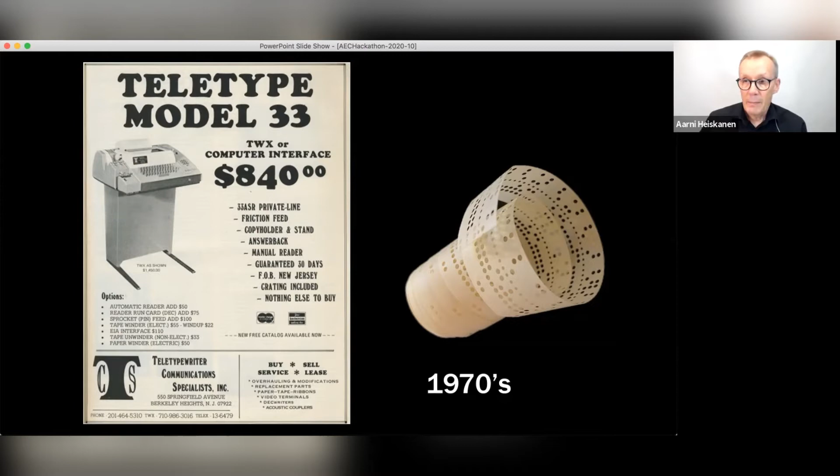Our industry is great, I must say. It can create awesome results, such as this library in Helsinki, but also it's full of surprises. In this case it was a pleasant surprise that it became so popular in a short time. But otherwise, construction is unfortunately full of risk, and it's a lot of manual work. It's not systematized, and so on. So it's full of surprises, and I'm not sure if everybody would like to work in a company that's full of surprises all the time.

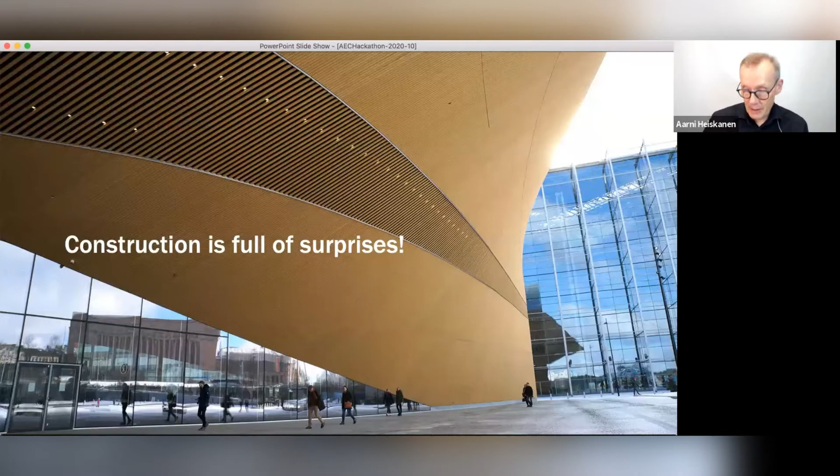This is another illustration from Aalto University that I've helped recently. They are doing construction monitoring using IoT, video equipment, and so on. This is data-based results, not just opinions or surveys. The diagram on the left shows that if you consider 10 minutes of uninterrupted work as value adding, of the time a construction worker is on the site, only 34% of that time is productive or value adding.

The diagram on the right shows different carpenters, plumbers, and so on - how much time they spend overall in the correct location. The blue bar on the left is about where they were supposed to be, so if they were supposed to be in that location at that time, that's the blue bar. It shows that most often, in 50% of the cases, they are not where they're supposed to be. So this is really a big problem in construction.

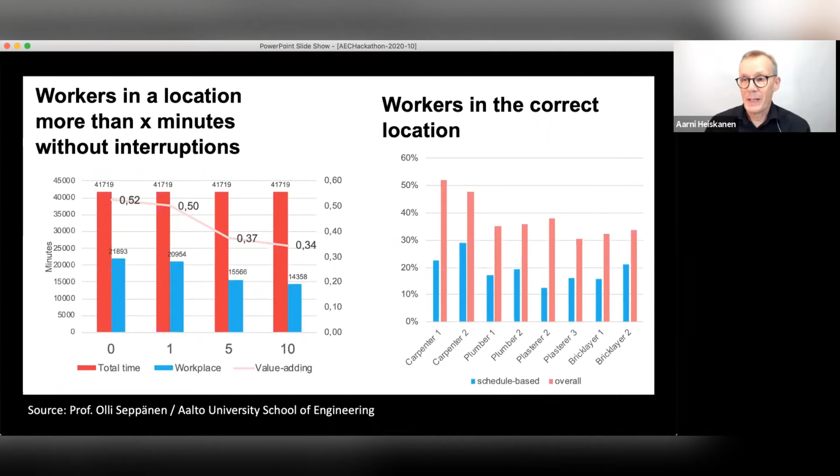And what is the industry doing about all this? There are three things that I find very interesting and promising.

Lean construction - the idea is the elimination of waste, how to eliminate waste in the processes. This is a typical takt planning schedule. As you can see, it's not a Gantt chart with long bars, instead it consists of short batches of work. It's very, very controlled, and the results are really promising. Takt planning can reduce construction time in certain cases more than 50% without any technology.

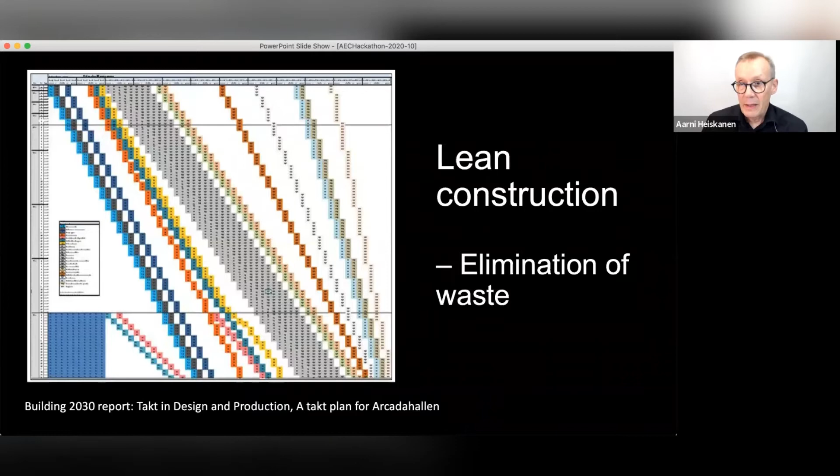The second thing I want to mention that's also changing the industry is integrated project deliveries - how to manage complexity and share risk and reward. This has been very promising in larger projects. For example in Finland, very much used in infrastructure construction, but also the same practices are now being implemented in even smaller, for example residential construction.

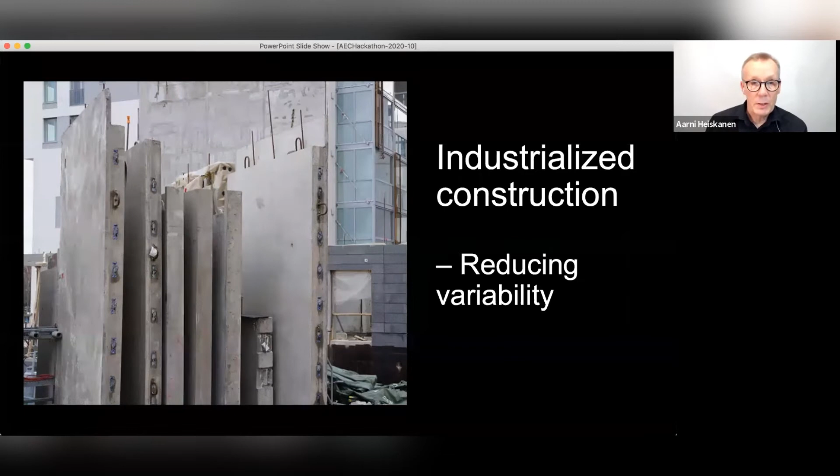And finally, industrialized construction. It means that you are trying to reduce variability - variability is the source of all evils, as one professor said in this industry. So the idea is to systematize processes, production, and get better control over the construction projects and construction sites.

So how does technology fit in to all this? I would say that technology is an enabler, but also a necessary part of all this change that's taking place.

If you're a construction company, design firm, or engineering firm, and you're thinking where to put your technology investment in the future, you might consider this idea: there are certain business necessities at the bottom that you have to invest in. For example, engineers and architects definitely need BIM tools nowadays. So that's a necessity.

But also, what kind of process productivity improvements can you gain with technology? What kind of risk mitigation can you achieve, because risk is a really big question in construction? And how can you improve worker well-being? What are those kinds of investments that you can do?

On top, there are information value-add investments, something where information creates added value. For example, we know that many companies are now hiring data analysts. So that's a sign of that. And also all sorts of open source information, open data that's available, could add value to your processes.

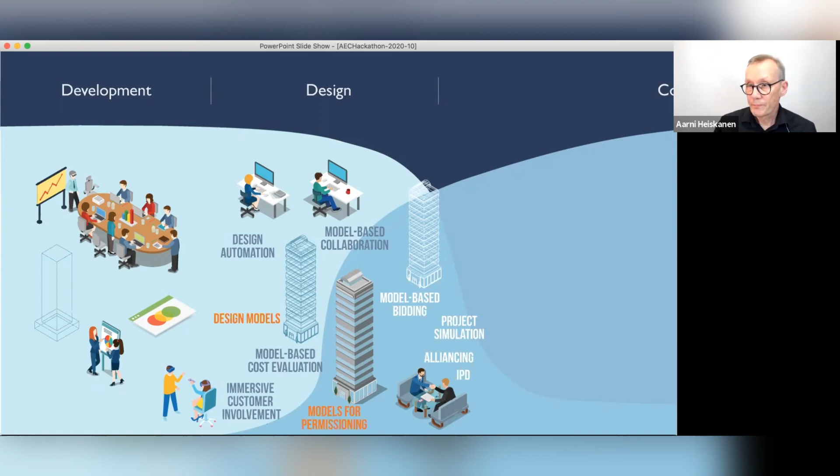When we move to the construction site, the actual construction and the whole supply chain will benefit immensely from digitalization. For example, factories or providers can now use models and data from models for automated fabrication of steel rebar, and use those for panel-based construction, concrete panel production, and so on. So the models work also for manufacturing.

We have sensors on construction sites, cameras, wearables, and so on, which provide information about what's happening, who's where, location and sensor-based health and safety information, and also tell about the phase or readiness of construction automatically. We've seen cameras used in interior construction, where you walk around the site and an AI-assisted system will tell you the readiness of certain rooms, kitchens, bathrooms, and so on, quite accurately. It saves a lot of time and makes this information available to everybody.

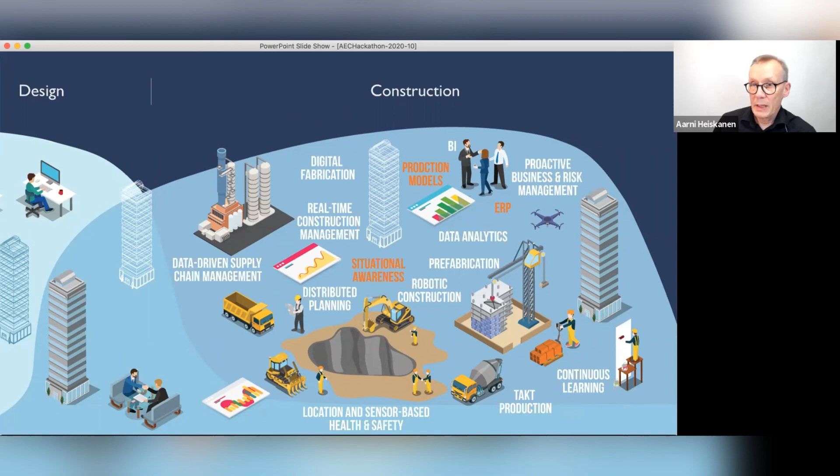All this helps in proactive business and risk management on the construction site, which is one of the key problems in construction, as we saw. Finally, construction creates a lot of data that can be passed on to operations and maintenance, but there is still, I think, a gap in that sense.

If you look at the whole picture, it's like this - that's the idea I was trying to present to you. We already have a lot of technologies and applications, and all that I've mentioned is already in use in some cases, pilot projects and so on. It's not that nothing's happening. We know there are several startups involved in all this, but my question to startups is that maybe you should also be aware of what others are doing and not try to reinvent the wheel every time. I see a lot of quite similar applications popping up, hoping to be the next big thing.

But also, if you're developing for the industry, you should understand the logic. I'm not saying accept the business logic and practices, but look into the future a little bit and try to figure out how it could be better for people, businesses, and the environment in the future. That's the kind of technology we will need.